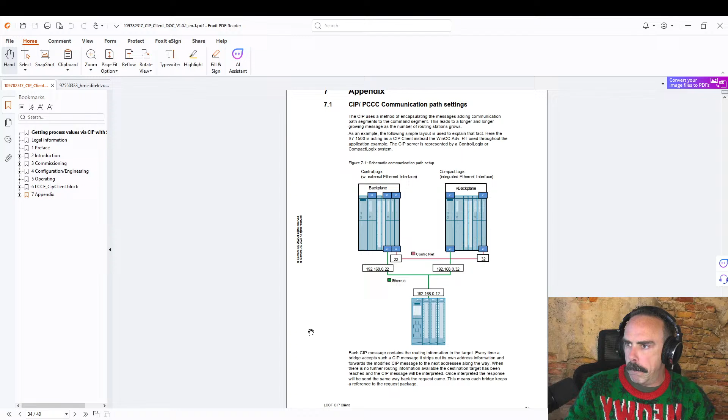There's these little entry IDs and a shortcut on the Siemens support website. If you search for those IDs, it'll go directly to this page. I'm logged in, but you don't have to be for most of this. I'll post these support IDs so you can put those into the page. Also, if you have a document like this that we're going through, usually the entry ID from Siemens is at the bottom, so you can Control-C that, drop it into the search on the support website, and it'll bring this up.

So this CIP client, we're going to talk about it a bit because it's pretty cool—you can access tags without having access to the Rockwell PLC program. All you need to know is the exact tag name and have a network path, which is one of the things we're talking about, because I had a commenter ask about that CIP block on a previous video.

The way I'm accessing it is through a project I used for that video. I have a 1500 PLC, and I'm accessing, I think, a CompactLogix L3 processor. I don't know Allen Bradley stuff that well, but it has an integrated Ethernet port, which is apparently not very common—fairly recent that they put that in. There's a lot of these systems out there with network cards, and the way I have mine configured in that video won't work with a network card because of this CIP routing you have to do.

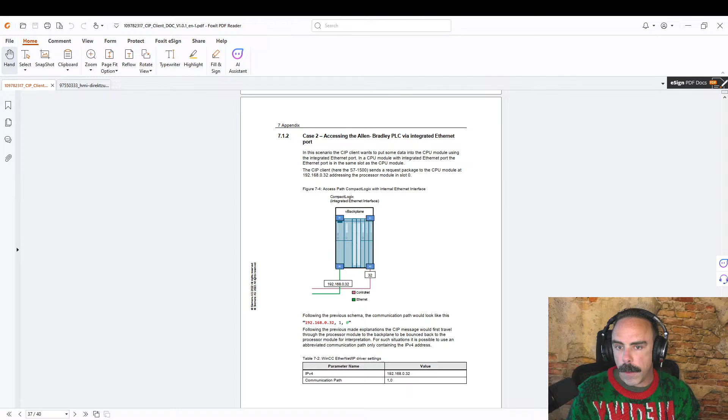The way I had my block set up, since it was a built-in processor, the control path—the communication path—is based off this example. Let me make it a little bigger, go to 100 percent. I have this new PDF reader because the set of drawings for this plant we're doing right now is so big that Adobe doesn't like loading a 50-some-odd meg PDF for some reason. So I'm getting used to this.

What we have here is a control path for a processor where the port is on the actual Allen Bradley processor, and this is what I'm using in my video. The first path for this CIP client block is always going to be set to 1, which gets it to the back plane. So it comes in on whatever interface, and then it goes to the back plane using this interface 1.

So it comes in on the network, and then the network card strips that away and says, okay, where do I need to go? I need to go to 1. And then it strips that away again, and says, where do I need to go to next?

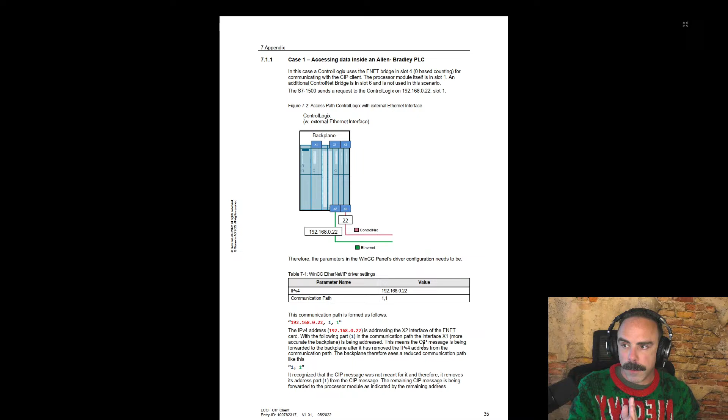So if that is the case, you absolutely can do that. You just have to do the same thing: point it to whatever slot your PLC is in. It can come in on this IP, then into the back plane, and wherever your processor is will be this slot number. The card itself is communicating on Ethernet IP or TCP IP address, so it strips away that and goes to the next thing, which in this case is going to be the back plane. All this is explained really well in this document.

This brings up an interesting point. You may or may not be aware that a control panel, a comfort panel, like a Siemens WinCC comfort panel, has built-in drivers to run with an Allen Bradley processor, and it actually uses CIP. So if you've ever used a comfort panel or Siemens basic panel and used an Allen Bradley driver, you've had to set up this communication path. This is what this is. In this CIP block there's a really good explanation of this whole CIP communication path, and it comes up really well when interfacing with a comfort panel.

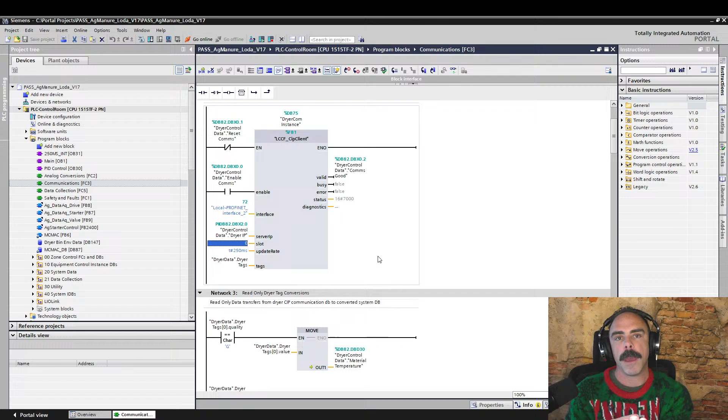So we're going to hit escape on this, we're going to hit up this. In mine, slot 0 is what you would be dealing with to get that to a built-in processor. So it's going to hit the back plane, come right back into slot 0. If your processor was in a different slot, then you would need to change the slot of this.

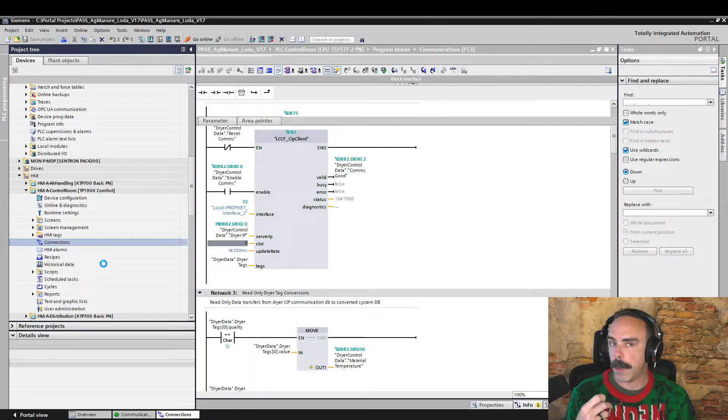I want to show you something real quick, though. We talked about this - by the way, this project is a fairly large project. There are quite a few HMIs, quite a few different things that we have on this. I'm going to show you real quick. I believe the connection is still set up on this, unless I deleted it. I didn't check before.

Ah yes, it is. So here is an Allen Bradley built-in driver connection for a Siemens comfort panel.

So this is kind of awesome. Thank you. Joining in from Russia, that's awesome. We've got an international crowd today. I love more people coming in and seeing this.

If you're not aware, right now we're talking about Allen Bradley. Allen Bradley's mostly in the US, so I'll probably get a lot of US views because I'm talking about Allen Bradley today. But we're going to be getting into some Siemens PLC stuff here in a second. This is the Control Logix, Compact Logix driver built into the comfort panels.

It uses this same CIP concept, and this CIP client block is kind of piggybacking on this HMI connection that Allen Bradley opens up. The reason we can access the tags through this CIP client block is because Allen Bradley wants to make their HMIs work well, so they give access to this. This CIP communication allows this tag access.

So what we have here, if you can kind of see it, is in this driver - if you select the Allen Bradley Ethernet IP driver in your connection on your comfort panel connections, it brings up this little screen. Your Ethernet interface, and your station is going to be a CPU type of either a Control Logix or a SLC - so Control Logix, Compact Logix, or your SLC or your Micro Logix.

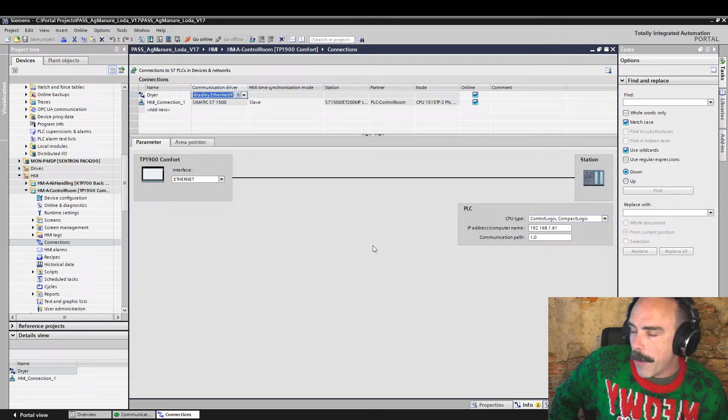Enough of the Allen Bradley thing. I think that the CIP connection is really great, but let's be real - you're probably not on this channel looking for Allen Bradley programming advice. And if you are, I'm not that guy. I have very limited Allen Bradley experience.

You are probably on this channel looking for some Siemens tips and tricks, and I'm going to close out this project that we have open, and bring up the project we've been working with for the past couple of live streams. We've been building up some S120 systems, some G120s, some T CPUs, all sorts of stuff. I want to show you the next part of our broadcast today, and it is going to be our HMI Direct Access.

So a couple of the things that we've been going through the past couple of weeks has been having to do with the...

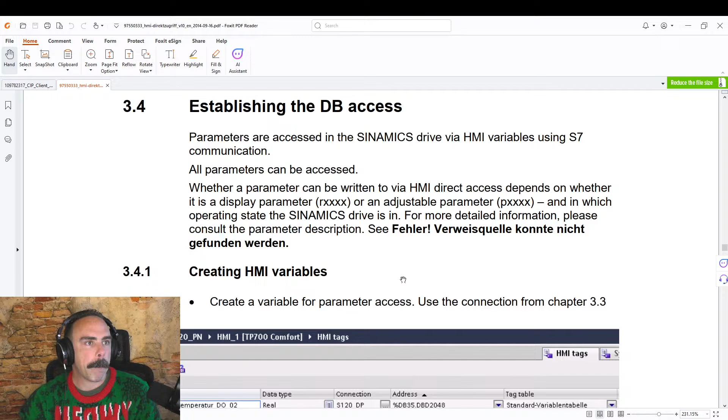So I'm going to step through this, because we're going to go through and set up an S7 connection.

Let's go back into our - my pointer's jumping between the two screens and it's really messing with me. So let's go through, and we don't have an HMI in any of these, so let's set up an HMI.

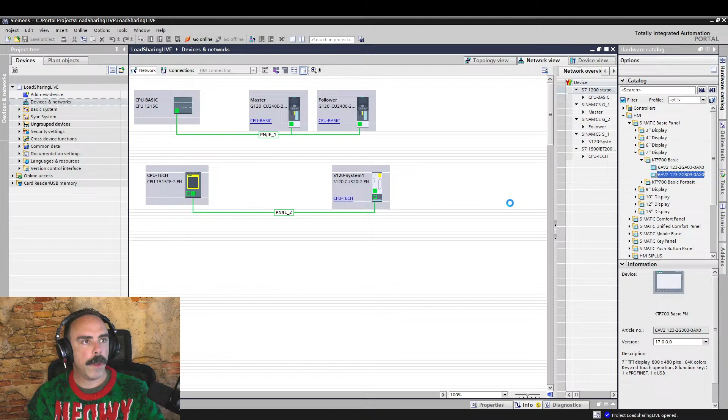Toss a coin to your witcher and let it spin. Don't be impatient, don't be impatient.

We're going to call this our basic HMI. There's a reason I'm putting it on this one, because I'm going to access some values on this, these G120s here. So we're going to save this.

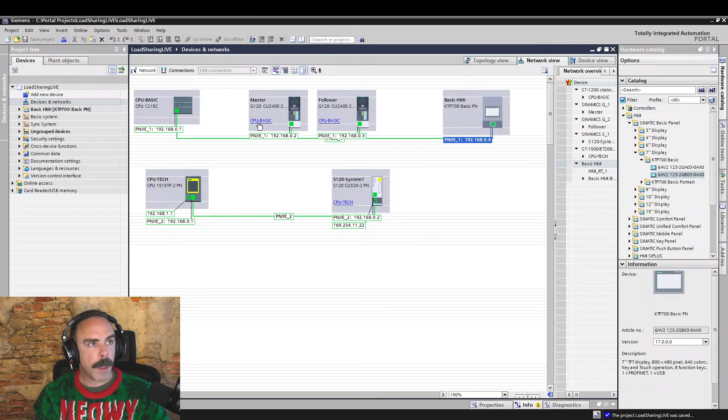I'm going to click this because I'm going to scribble this down - we're at 168.0.2. I'm just writing this down because I don't remember anything that I don't write down. 02 is our, and we're going to access some values on that.

So for the time being, we're going to pull up our HMI, go to connections, and we are going to add a new connection. We're going to call this our master drive.

I would say type F in chat for you master drive people. Oh, it's such a great drive.

Memories. But what we're going to use is our SIMATIC S7 300/400 connection, and we are going to use the Profinet interface on this. What was that, 4? Yeah, 4.

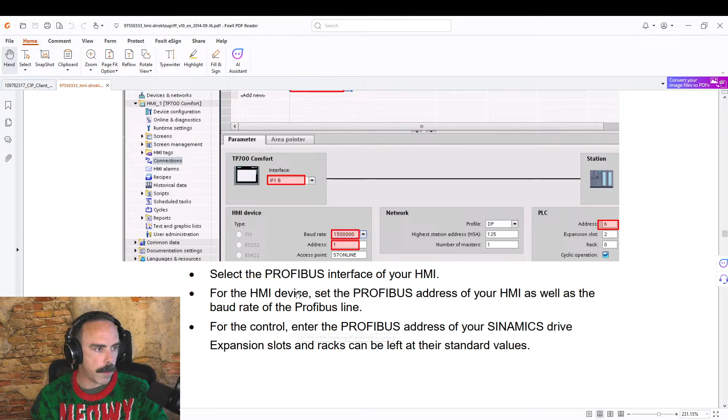And this one we are going to point to our drive, which is on 2, and check to make sure we're doing everything right. Oh, this is a Profibus. Why would you do it Profibus? Here we go.

So the Ethernet of your HMI, and then for the control, that slot 2 expansion are not relevant, because the expansion slots in the racks are not relevant - this is doing some back-end shenanigans to make this happen. The trick is, once you set up that connection like we have here, it's really all you need.

And we're just going to create a tag now. What parameter do y'all want to get? I know we need R89, right? We're definitely wanting to read that, I think, and that is phase voltage U,

and then we're gonna do - and this is actually a real value, we're going to talk about that here in a second - we're going to do U, V, W on these. Here, U, V, W. Okay, so our connection is going to be on our master drive connection, for all of them.

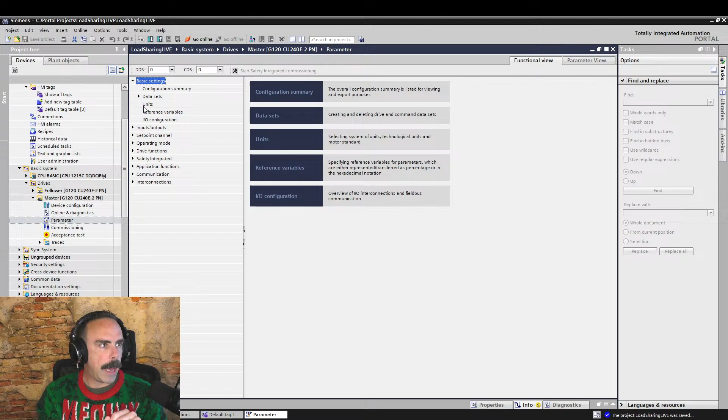First, let's go through and open up this drive master and get the parameter, because I want to show you parameter 89 specifically - it has parameter view, probably extended parameters, and 89. Oh no. Was it 89 that we were wanting? We were wanting phase voltage. Maybe it wasn't 89.

Or is it just that we are going to... we won't do that right now. We totally had this before. Oh, it might not be on. Hold up, is this only available on S120? Have we done this? Have we made this work? Is that what we're looking at here? Because 89 is actually only on...

Yup, there's our problem. So, all right, real quick - you know this is live, and this is real world stuff. R89 is only available on an S120 apparently. It's not available on this, so let's do this real quick. No one will know the difference. Oh, that's probably... is that going to delete the whole thing? Okay, no, no one knows the difference.

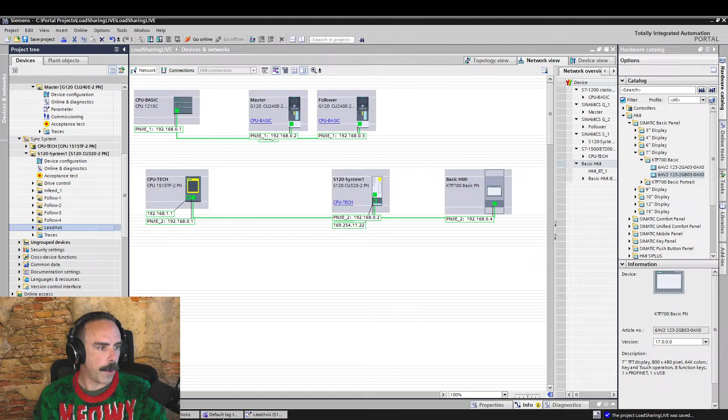024. Yeah, and this will actually give us a little bit better. Now, the cool thing about it is the same stuff works because we are still in this, but we were wanting to do 89, and I realized that it got quiet all of a sudden because the music died. Okay, so we still want to do this UVW.

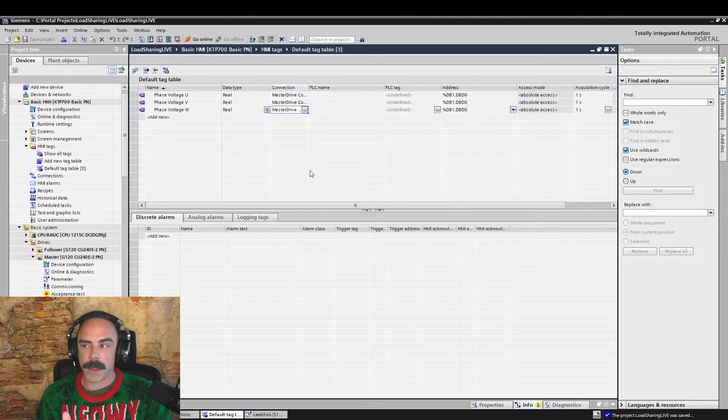Now, doing this on an S120 does make it a little bit more complex, but not too much. And if you don't appreciate that because this is all in a single portal project, I was able to do what I just did, and that this would actually be okay - if you don't appreciate that fact, bless your heart. Portal can be cool sometimes, when it's not eating up like 32 gig of memory and crashing your computer.

But no, so we've got this actual phase voltage that we're looking at here. And let's look at this documentation here, because what we're going to do is point to a specific parameter based on how we make this address. Okay, so the basics is the data block number is going to be your parameter number. And then there's a little bit of a thing for the data block, like the actual DBD value.

For us, it's going to be DBD because this is a real value, just like we have here in the motor temperature that they're pulling through here. So we're going to go ahead and say this - I'm going to pull this down on another screen. So our DB value is going to be DB 89 for all three of these, because it is parameter 89 and then it has an index. So parameter 89 for all three. And then now let's go back to this and figure out what this parameter index is.

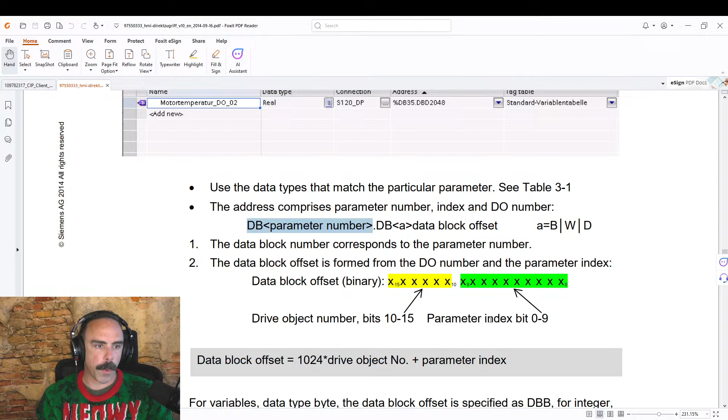Now, because this is on an S120, we may need to - well, in the compilation, this connection - so the question was whether or not the connection needed to be updated because we changed networks. So the thing about this connection is when we do this compile, this is the interface for the HMI, and this is the interface for the drive. And as long as this address here, .2, is the same for the drive, then there's no problem. So normally you would absolutely have to have gone and done that, but it just so happened that...

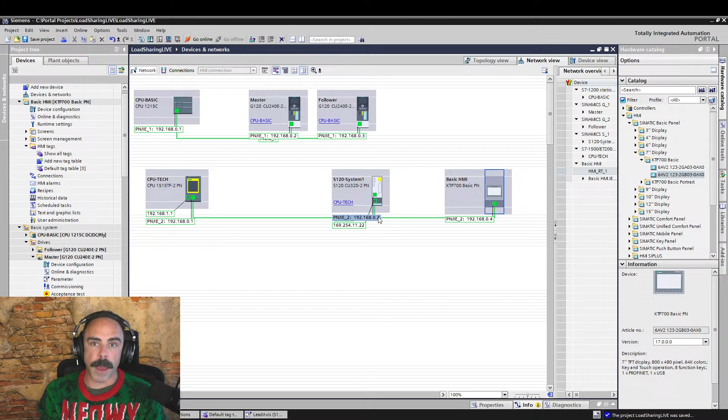the master drive has the same IP address as the S120 system. So the HMI doesn't know the difference, and because this is in a portal project, the HMI can be shifted around in between all of that. So great question, Steve - if this was, say for example, on the same network, and this was like a .7, we would absolutely have to go back in and update this to a .7. But it just so happens, by happenstance or by luck, the IP addresses were the same for both controllers. So great question.

So back to this difference - the reason I was going to do this for the G120 is because the G120 technically has drive object numbers, but it's just the same for everything. An S120, because it is one drive system to rule all drive systems, has so many different options of drive kind of objects. So if you're not familiar with what a drive object is, let's go into the device view of our S120.

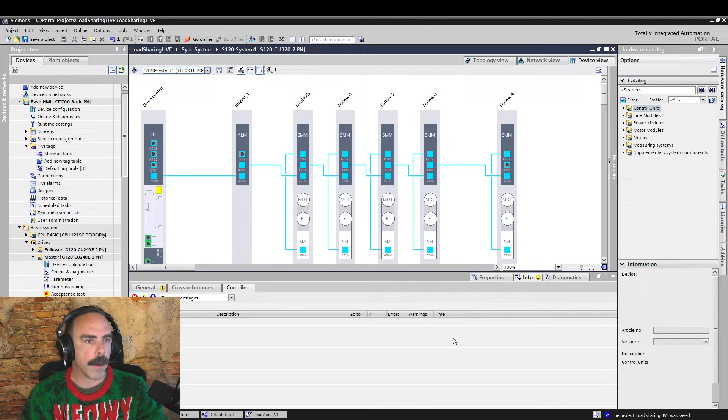There's actually a lot of stuff underneath that one point, and that is a highly technical term - it's a lot of stuff. Let me hit Control 5 to pop up our inspector window here, and I want to show, if I click on this, it brings up all of our stuff.

Where does it show it? There, it talks about drive object numbers in here. So this is where you'd be looking for the drive object number in Starter. Drive object numbers, you can kind of think about it - if something has an expert list, so it has a parameter list, it's going to have a drive object number. Control unit, terminal blocks, motor modules, CB boards - like anything that has an expert list or a parameter set has a drive object number.

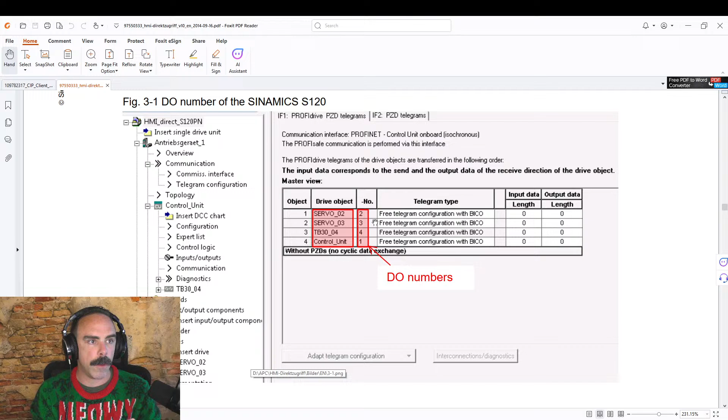Here's how you find them in Starter - it's just in the telegram configuration. It tells you the drive object number. Hopefully Portal has it in kind of the same place. It's probably the slot number if I had to guess.

Let's see, does that change? Oh no, I need to stop clicking. Nope. Where is it? So let's see if we can find it - this goes back to me not being prepared. Ah, there they are, item numbers. It's kind of the same place. What are you talking about? See, I knew where that was.

What are y'all saying? So drive object numbers - these item numbers in your telegram configuration are your drive object number. So for this, we're working with our lead axis, and we have a drive object number of 2. In a G120, this would always be 1.

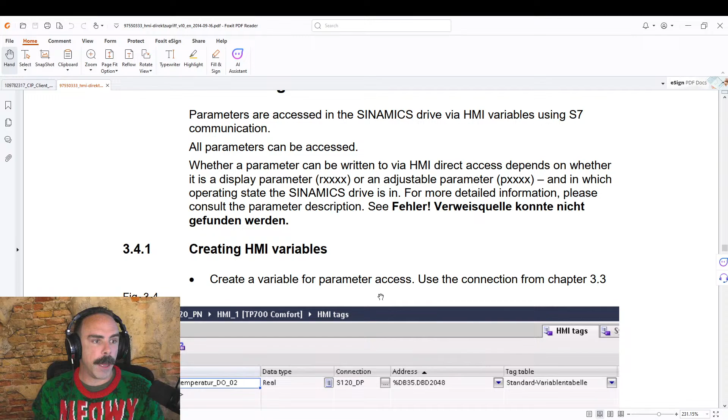The reason why this is important is because in our documentation, our actual - so you have data block number and then actual word number. In this case, because it's a real value, we have to do a DBD, so a double word. But our actual data value is not straightforward. So our drive block offset, our data block offset, which is that DBD, is 1024 times drive object number plus your index number. So how about let's do this?

Because I want to go through this, let me get my stuff pulled up here and start it up so I can draw. Has anybody in chat actually ever used these functions while I'm getting this up?

We've got a couple of people here today, so if you've used this direct parameter access, let me know in chat, because I don't think many people know about it, but it's one of the coolest things that you can do.

So, is this gonna work? Yes. All right, so let's flip over to our page, our sketch pad down here, because I want to go through this. Most I have not found many people that - so our DB is 1024 times drive object number.

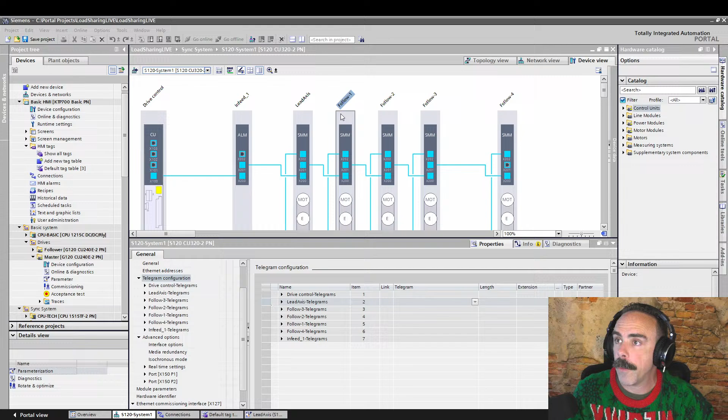That's it, for real, that's it. Now we could go through and set our acquisition cycles. If you notice, we can get these pretty quick, acquire them pretty fast. Let's say fairly fast, and you can actually set up faster ones of these. I don't think you can set up much faster on the basic panel.

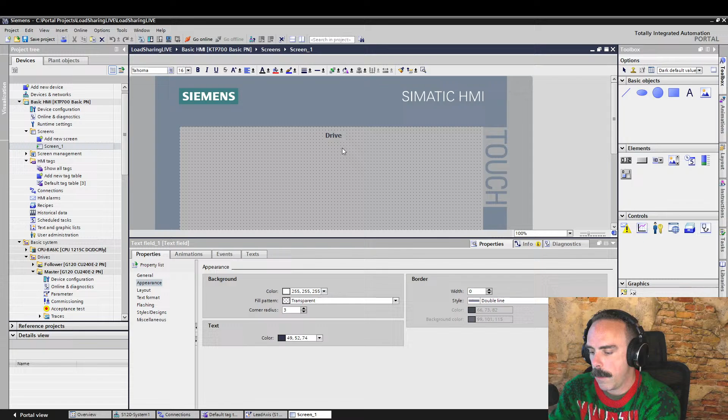So 100 milliseconds right now on this basic panel is probably about as fast as we're going to be able to do. But let's make a screen, and let's just do some quick... let's do this, drive. Okay, and then we want some outputs.

That's terrible. Undo, undelete. I wanted to do click here and then...

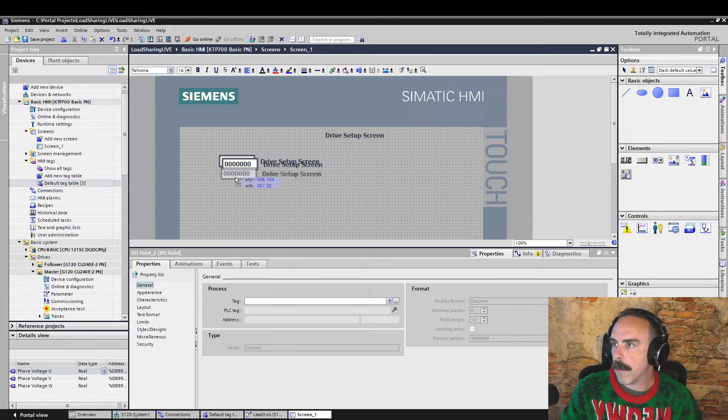So what we're doing right now is we're just setting up this tag. So we click here in our inspector window, and then actually before we do that, let's do this. Control, C, V, line that up, and then V. Oh look at that, so fun.

So then now let's just drag this over here, actually get it in the box. Drag V. Click. Drag V. So that's U, V, W.

And so that will, on a 100 millisecond cycle, set up our drive. So that's that R value that, remember, could not be connected via BICO. So we couldn't bring it back over our Telegram in our fast update cycle. But using acyclic communication, which this is using, we got these values.

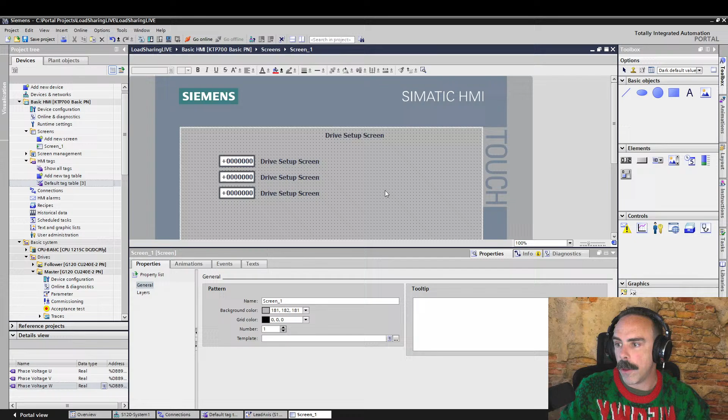Now this is coming into a HMI, and this is using HMI Direct. And before we get off this, I want to show you, just put some stuff into your minds about the drives. So Control 5, drop that down.

So your parameter 300s are all your motor values, right? And if you notice, all of these are kind of locked. And the reason why these are locked is because they're only accessible when you have a certain parameter value, which in Siemens world... I'm clicking a bunch of stuff.

And I know I have some FA guys from Siemens USA yelling at me because I'm only doing this in expert list and parameters, and you're making it seem more complicated. Well this isn't straightforward. If you don't know what you're doing with drives, you probably don't want to be doing this. But one of the things is these values that are like your motor parameter numbers.

So like, let's see, rated motor voltage. It's got this little lock on it. That lock is because this is not in a commissioning state.

And so what we can do is if we go up here to P10 and we set it to motor commissioning, should give us the ability to change some of these. Actually, well, maybe it's the fact that it's not on. Well anyway, something's locking that out.

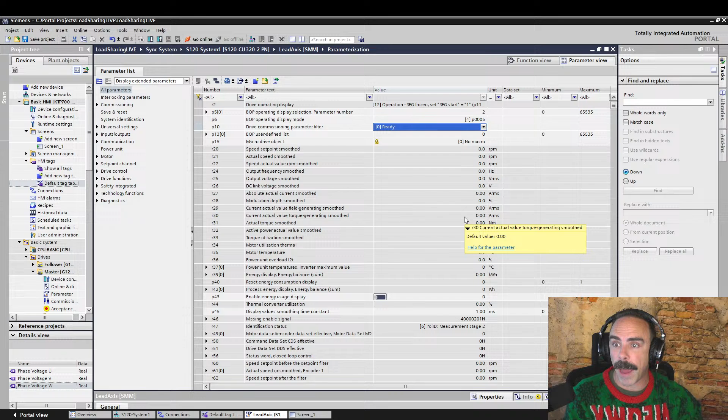Just in the parameter list for right now, and it's not really the point. But if you wanted to change some of these values online, for example this drive commissioning parameter, this P10, if it is set to ready, there are some values that you cannot change parameters for. And now with BICO, you can't change any parameter because it's not a BICO, it's a P value. So like these P values here, unless it has this BICO connector, you can't connect something into it. So these P values here, you can't change that value through a Telegram.

But with acyclic communication, you could totally 100% go through and use our HMI direct access and set up a screen to where you could go through and set up motor values. But if you wanted to set up motor values, you would need to put the motor or the drive into this P10, it would need to go into motor commissioning.

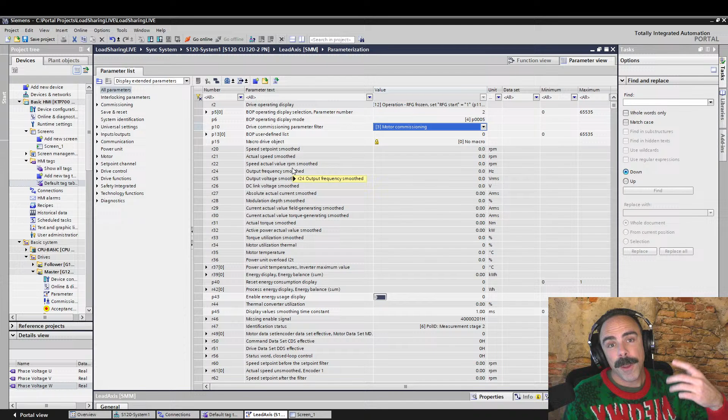So on our little screen here, we would want to have, instead of an input only, we would want to have this as a, did I pull that? We would want to set this up as an input output and then set up a tag for parameter 10, and do the same thing. So that way we could change P10...

To 1. And then if we wanted to really even go, we could even go as far and do a text list, and instead of using an output, we could go and do this type of stuff here. This isn't quite HMI, wanted to talk about acyclic communication, and this is an example of it. You are directly accessing an acyclic block. So let's go down, and I'm going to show you how to do that in your program now.

And I just realized that I may not have this library loaded in here. I wonder if we do. I don't think I do. I think I might need to load up.

No, it doesn't look like it. Because what I am wanting to do, I'm not going to be there anyway. So we're going to bring up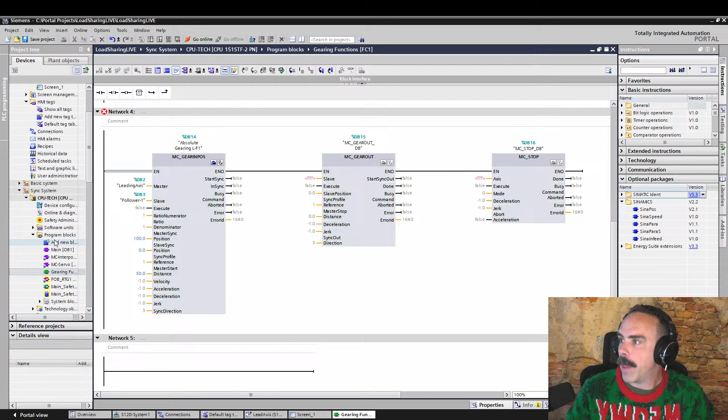So we're going to talk about an acyclic block, and let's go ahead and make our own little block for this. Let's add a new block called parameter access. We're gonna do this little function block here. Don't care about all that, we're gonna make this new one, and we're gonna close out everything but that.

Because what we are going to use is a little block called SinaPara. And so we want to use SinaPara, and let's do this to a G120. Well yeah, if we want to do that we need to do it on the other, because I think the SinaParaS specifically has a drive object number.

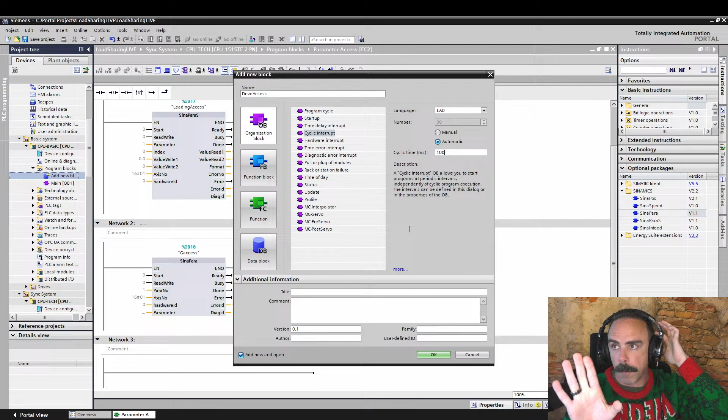So this might not be the best way to do this, but I just wanted to show you the OB30 block, the cyclic interrupt block, because we're going to use that for the PID here in a second as well. So we're going to use this drive access, open that up, and pull in our SinaPara block into this one.

Now inside of this access, in this one we would just be able to do like a no op, because I apparently don't have that constant defined. Anyway, so we could run this all the time. So this would be like we could do an always-on bit for this.

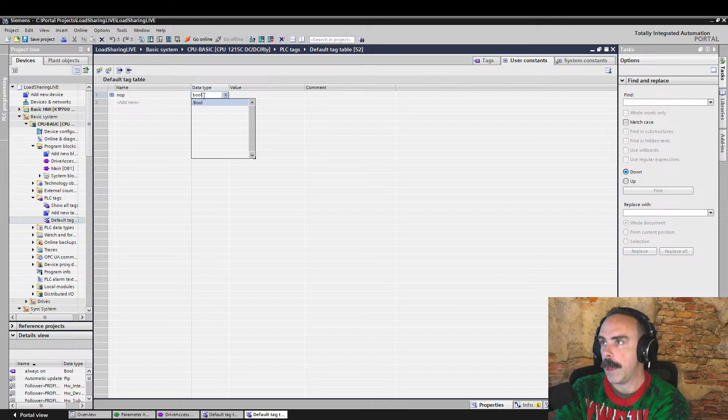We could do that as an always-on tag. If we wanted to define that tag, we could just set it as M0. And if we wanted that to always be on, we'd go here in our PLC tags and set that. This is what I like to do: I like to define it as no-op, data type Boolean, value false.

The reason we can do this is that anytime this comes in, you know it's been 100 milliseconds, because this cyclic interrupt block is only firing every 100 milliseconds. So you can start this and run it as often as possible.

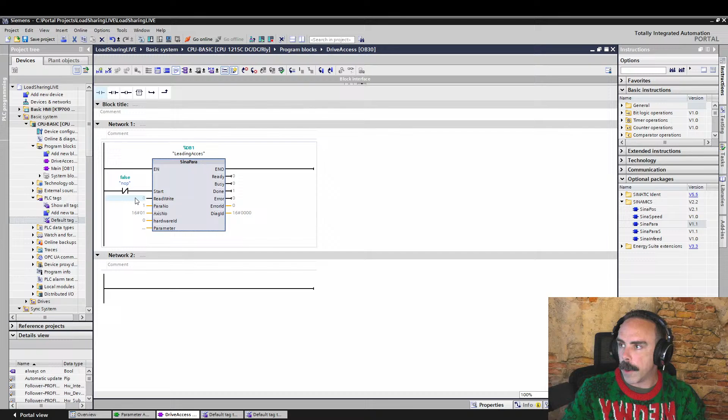For this one, read-write, does this have it in version 17? I don't think it has them. Read-write is whether or not it is... function block. So 0 is read, 1 is write. If you're just wanting to read this value, we'll just leave it at 0.

Parameter number is - I believe that parameter number, sorry, I'm looking at the actual number of parameters. Interesting. Yeah, so it's the number of parameters you're reading. So you can read up to 16 parameters. I got that one backwards.

And so this input value here, for the input interface, hardware ID - using this block, the hardware ID is going to be the hardware ID of your actual device. I believe, for Profinet follower, make sure it's your module access point. It's not the Telegram, it is the module access point. If I'm wrong on that, I'll have to look it up again.

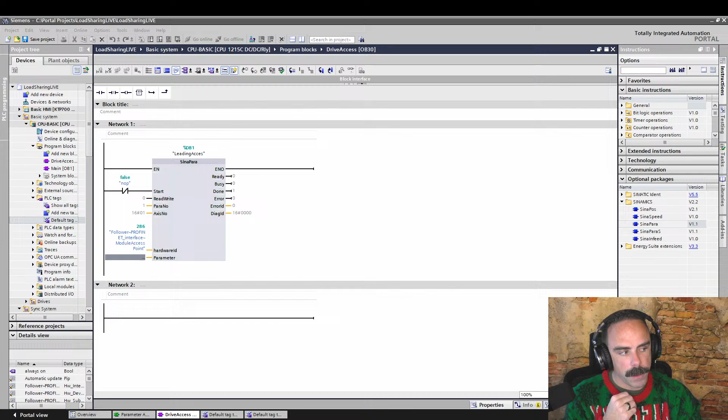So not quite as simple, and maybe we're getting off in the weeds here and losing our momentum, but what we're talking about is this parameter value, which is the last input. The first five inputs are fairly simple: the axis number, drive object number in a multi-axis system.

So the hardware ID - let's go back to this. To make sure I'm explaining: hardware ID and axis number. Axis number for a G120 is 1. Axis number for an S120 is that drive object number we talked about before. Parameter number in this case would be - sorry, no, it would not be 89, it would be 3, because we're wanting to pull 3 parameters, 89 index 0, 1, and 2. This parameter value is the tricky thing that can get you hung up.

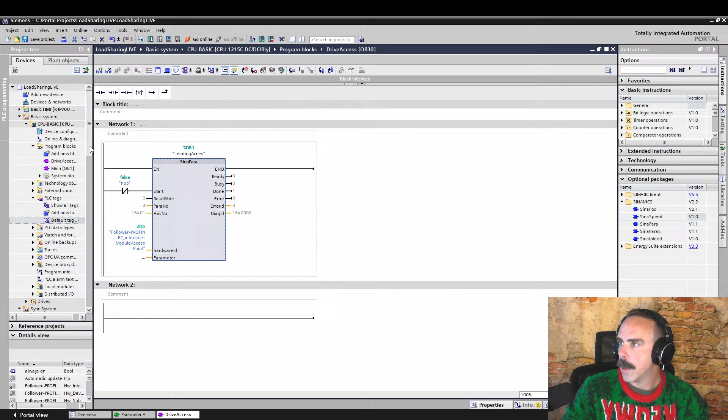SinaPara, this little data block structure leaves something to be desired. So let's jump real quick to where we want to do a PID. Let's add a new block. Actually, let's go through - not gonna lie, this is something I've set up before. There's a couple ways of doing it.

I wanted to show you the technology object way of doing this PLC or PID, because in your technology object you have a PID, and you have a couple of different options. You have this PID compact, which technically isn't what you'd think of as a technology object. The technology object is just like an interface into setting up another block.

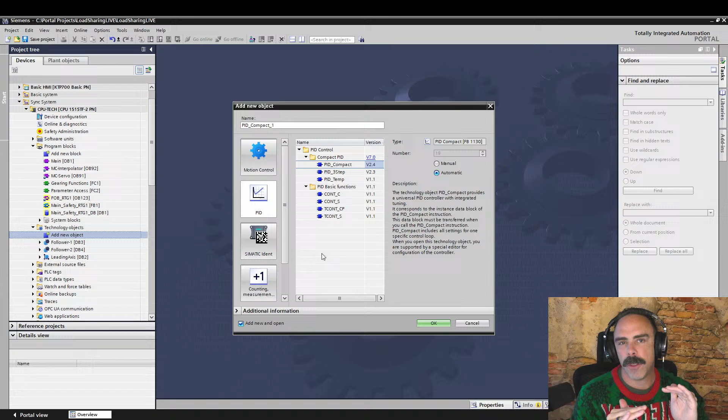I think it says here - yeah, the description says the technology object PID compact provides a universal PID controller with integrated tuning. It corresponds to the instance data block of the PID compact instruction. The data block must be transferred when you call the PID compact instruction. The PID compact includes all settings for this control loop.

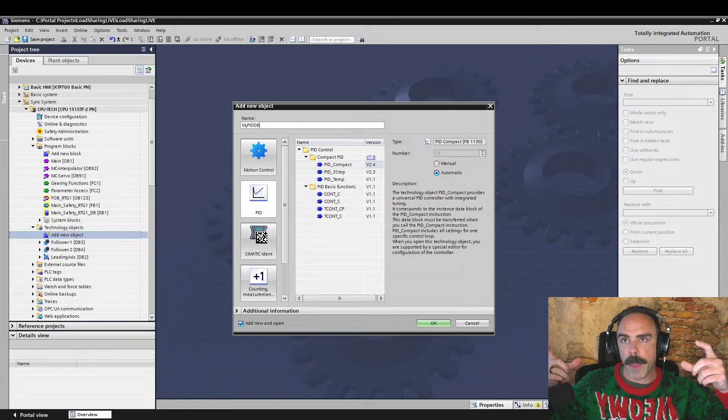So I'll show you what we do here - we'll do my PID data block. If you set it up this way, this is the instance data block for another call that we'll talk about later. It's a little confusing going about this way, but this channel has a lot of technology objects, so it's easy to set up all the values using the technology interface.

So we'll go through and do this PID compact. It's super easy, straightforward, something I've done in the past - hopefully past Jason can inspire present Jason to set this up on the fly. General percent - your controller type, a general PID, in percent there's no units, and you can set up different things, and it will set up scaling and scale factors and everything in general. I normally use just a general percent-based PID.

Because I'm going to be sending this value over to my drive in percent. Remember that this value is just being set - I just realized I had blocked all of the library things because of where my head has been this whole time. We're learning here. But this is just setting your PID in the processor.

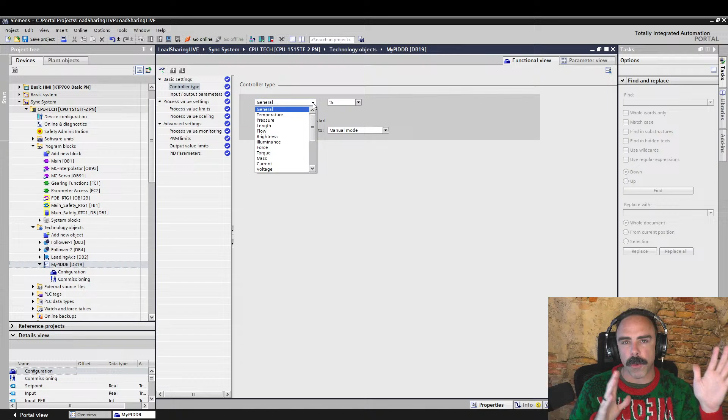So we're going to leave this as general and percent. This invert control logic is saying that by default, if you have a bigger error signal, you need to have a bigger output. Inverted means that if you have a bigger error, you need to have a smaller output. So it's going to be making a smaller subtraction.

So we can kind of just go through here and talk about this, but these are just going to be tuning values that we'll be working with later. I want to show you how you actually set this sort of stuff up.

Now, I will say this thing has a self-tuning mode on it, so we're going to do this most likely. In our advanced settings, we want to enable our manual entry. Our proportional gain, depending on what we're going to be doing, one might not be appropriate. We'll talk about what these are in a second, but I want to show you how to set this up.

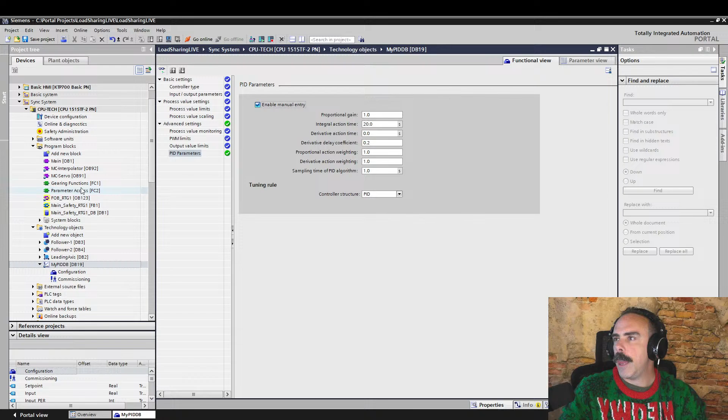And if I remember correctly, there may even be a thing where you have to bring in a value for this. It might tell it how often it's being updated, because this is a PID—there's an integral value, so there's a continuing time section on this.

So what we're going to do is create, click the wrong thing—we're going to add a new block. We're going to add one of those cyclic interrupts, and we're going to have our PID cycle. This is in microseconds. If you notice, the S7-1200 was in milliseconds; we're in microseconds because we're on a 1500T. Orders of magnitude different performance levels between the 1500 and the 1200.

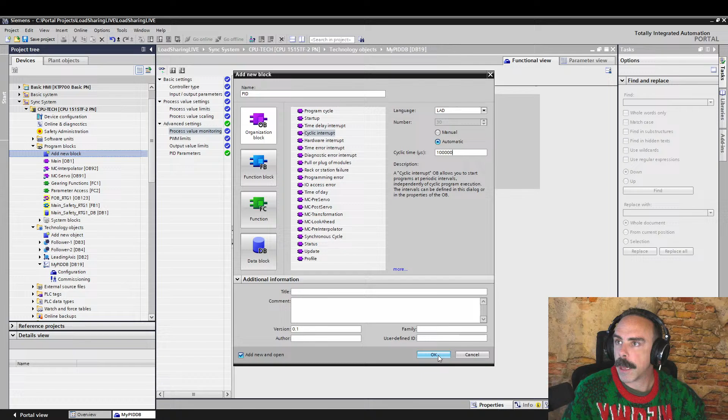So let's do this. Let's go 100 milliseconds would be... right, so by default it was that same thing. So 100 milliseconds by default, but this is in microseconds. So 100,000 microseconds is 100 milliseconds, cyclic interrupt, PID.

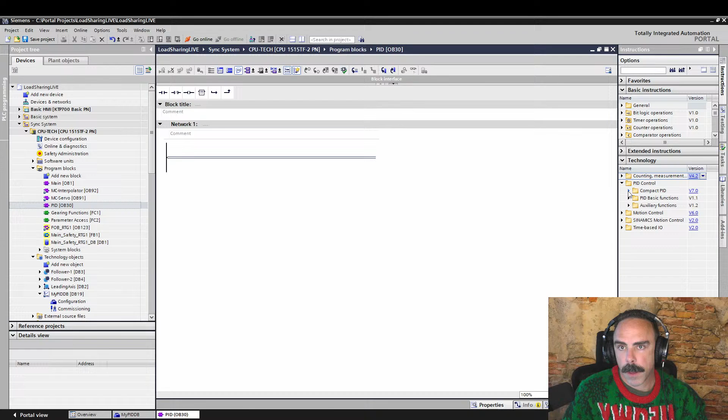Now what we're going to do, I believe, is in technology, PID control, compact PID. So PID compact, right? And now we are actually going to select my PID DB—the data block that was created by that technology object menu, that's what we're going to select. And we're going to bring this in.

So apparently in this version of Portal, which I believe is version 17, it has automatic detection of how often it gets updated. Before, there would be an input that you would actually have to tell how often it's getting updated. So that's cool.

Now, if you'll notice, I brought up the extra inputs. You have your set point, your input, and your input in percent. Let's bring up the help file on this just to show kind of what we have going on.

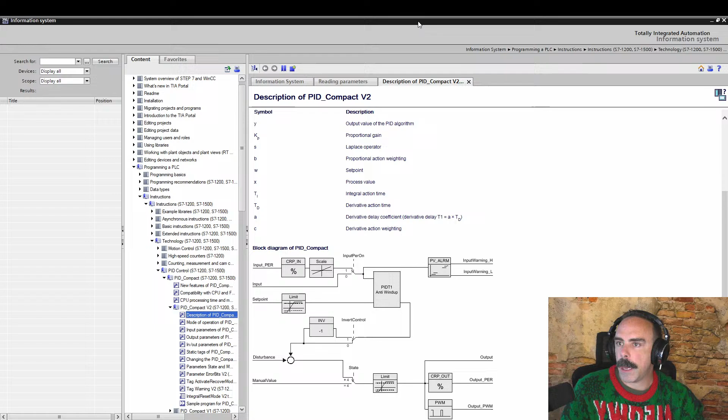And this can get a little complicated, so let me take the time to go over here to this and clear that. If you're not familiar with these control charts, is there a way I can zoom in? These kind of might be a little bit annoying or a little bit confusing.

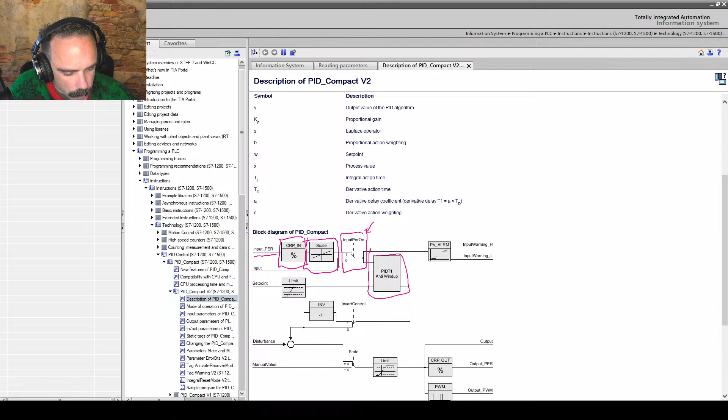But just know that you're going to be following through, and then this is going to be some operation, and then this is some switch. So if you have your input in percentage on, it switches between the input in percent versus your input in the standard input. Again, this is a function, and you're just following through these functions, and then it's going to follow through and go to your output.

So that might have made it worse, but just know that in these, you're going to be looking at—what is this? Who knows? You don't really need to know, it's a black box, you don't have control over it. Your percentage in, your input coming in—this is some sort of scaling that you're going to be using.

So we're going to go, our set point is going to be, for example, let's do a flow control, and we have our... all right, let's see, let's do it this way. Let's have a pump that is connected up to a G120 drive.

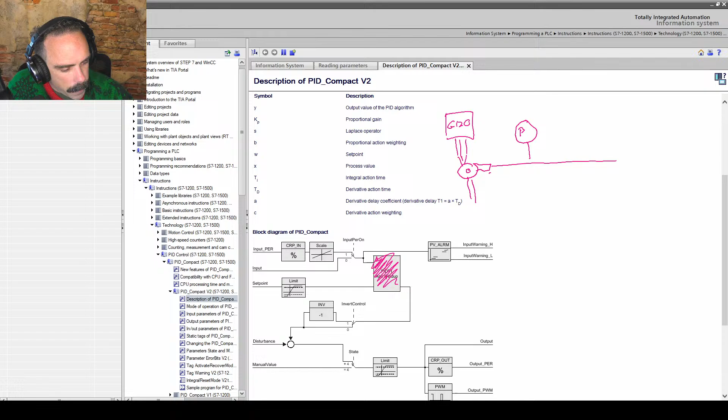And it's connected up. Okay, we have our pipe, and we have a sensor here that is pressure on this pipe.

And we want to control for pressure. There's a couple of different ways that we could do this. We can send our set point signal. Our set point is going to be the set point for this. So what we want to actually control is pressure.

And we kind of go through here. Set point is pressure, and then you need some sort of feedback. So this actually is the feedback signal. This is going to come back into our PLC, and that is actually going to be our, where is it, invert control, disturbance.

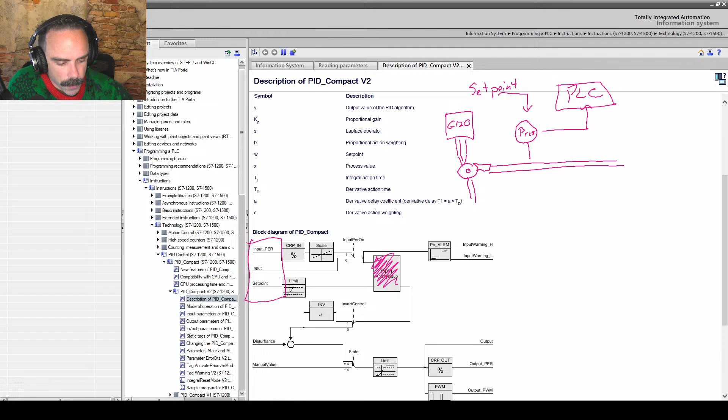So our actual input is going to be this input. So here's how to think about this, because both of these values, both input and set point, this is essentially our feedback, and it's going to generate an error signal that is going to send us an output that is going to be higher or lower.

And so our output percent is going to be what is going to actually be going to the drive. And if you do everything in percent, it just makes a lot more sense.

So what we're going to do is, if this is like a 0 to 100 PSI gauge, we're going to take and scale 0 to 100 to 0 to 100%. Now, it just so happens if you had a 0 to 100 PSI, it'd be the same numbers, but this might be 0 to 1000 PSI. And so you would want to scale that to 0 to 100%.

So if you're doing all of this in percent, then that's what you're wanting to accomplish there. Your drive is going to be 0 to 100%. So the output of this is going to be in percent.

So with that said, you're going to bring in 0 to 100% for your set point, which you can absolutely go through and have on your HMI a screen that's like, what's your set point? What's your set point pressure? And it be in PSI. But you're going to need to take this value and scale it.

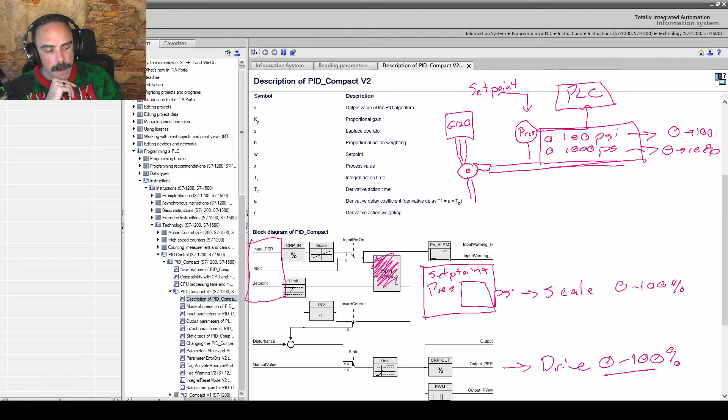Because if a drive speed of, say, 10%, I'm going to clear all of this. So if a drive set point of 10% generates, say, 2 psi, and the same set point at 50% generates 5, and then 75 generates 10, and 100 generates 30,

and you set an input set point, so like a PSI set point scaled to percent of, if your range is, I mean, it's nice to know, because I'm in this setup, if you know your PSI range is 0 to 30 for your machine, and you put in, I want 30, or I want 20 PSI as a set point, it's going to convert that to whatever that is, 80%, whatever it is.

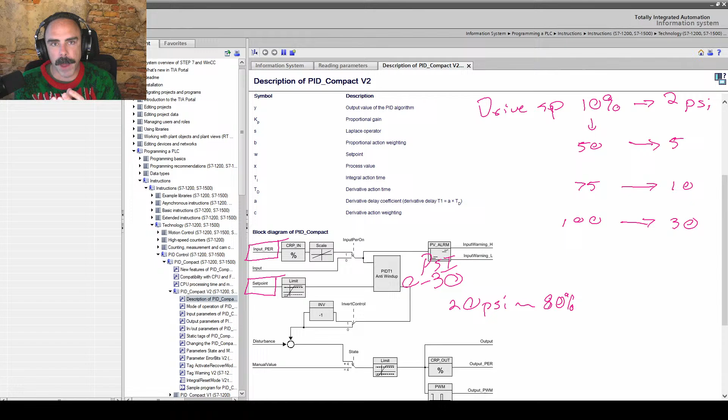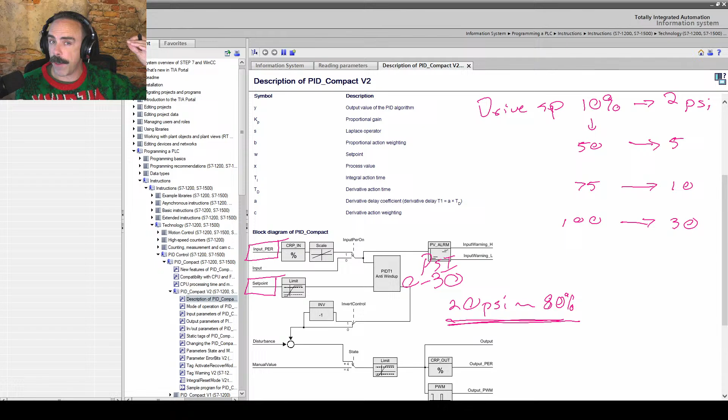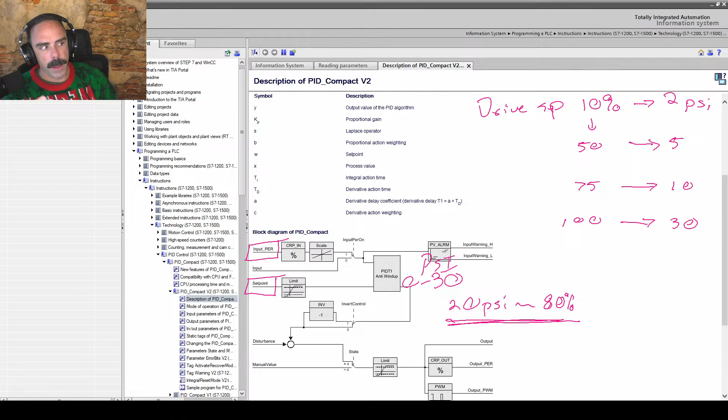Yeah, it's kind of hard to explain until you actually start working with it, that you're, because when you first start thinking about it, you're like, oh, how do all of these figures relate together? But there is some relation, and the PID function itself is going to ramp up and bring, if you have a set point of 20 psi, if like your 20 psi set point equates to 80%, and your feedback is going to be on that same psi, 20 psi equals 80% on your feedback, then it doesn't matter what the actual output is. It doesn't have to be 80% on the output, if that makes sense. And maybe I'm overthinking about it. It always confused me when I first started working with PIDs, like how, so yeah, so at 80%, you're going to have, so I'm looking at a Siemens.

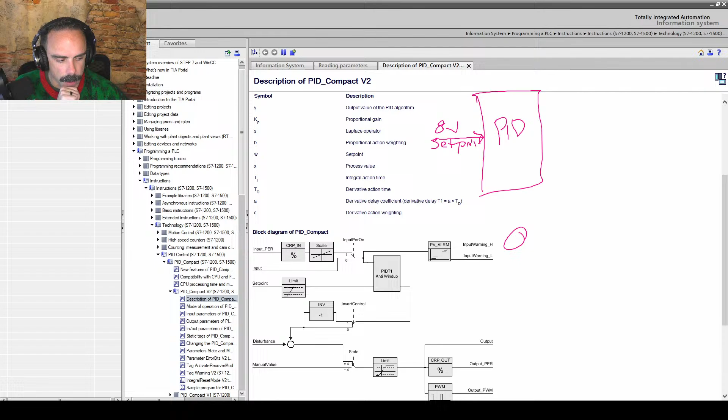If it's 8 volts at output, and it's in a 0 to 10 volt range, that's exactly going to be right. So your input, if you're at 80% going into this PID block, your input would be 8 volts going in - sorry, this would be your set point, would be 8 volts. So your feedback coming back from your actual sensor needs to be scaled to where 8 volts equals 80%.

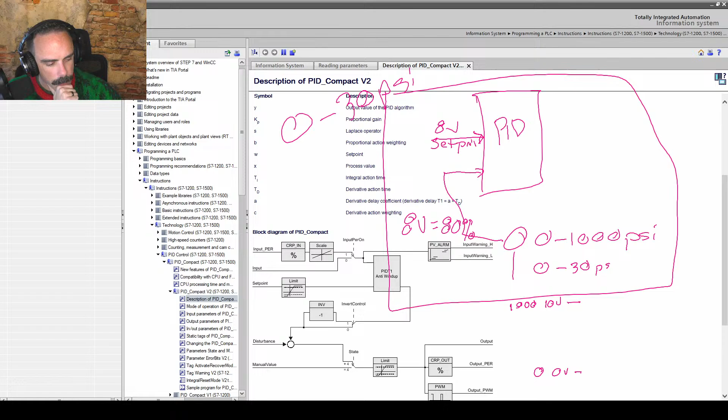If that makes sense - even if this sensor is like a 0 to 1000 psi sensor, if your whole system itself is only 0 to 30 psi, you need to have on your sensor - you're going to lose a lot of resolution on this sensor, because you're only going to be using 0 to 30 psi, but this sensor is going to be like, if this is a 10 volt sensor, 0 to 1000 is 10 volts. So 10 volts, 0 volts, and if that sensor is that way, you're way down here - you're like 30 psi way down here. So you would have to scale this little bitty section as equal to 0 to 100%.

That might be confusing, but that really goes back to - if you can only output 30 psi with your pump, you don't need to be using a 1000 psi rated sensor, because that scale value, you don't have any resolution. You have like one tick, and that's really not going to work well with a PID block, because it's going to see the ever so slightest bit of noise in that 1000 psi range show up as 2 or 3% swings in the feedback. And so this would be a horrible system.

Now, if this were a 300 psi sensor, maybe not that big of a problem, because then you're going to be looking at about a third - you still could probably find a better sensor there, but now you have this whole range here. You would have 0 to 3 volts instead of 0 to 0.3 volts or 0.03 volts, whatever that would be.

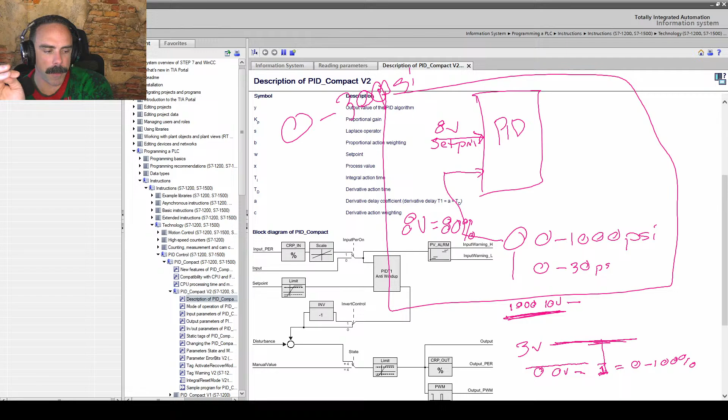Yeah, sorry for rambling on this. The first time I started doing a PID by myself, it didn't quite make sense, and I'm sure I've just confused you even further. But if you have questions, and you're watching this on demand, feel free to ask. I absolutely love working through these with you guys too.

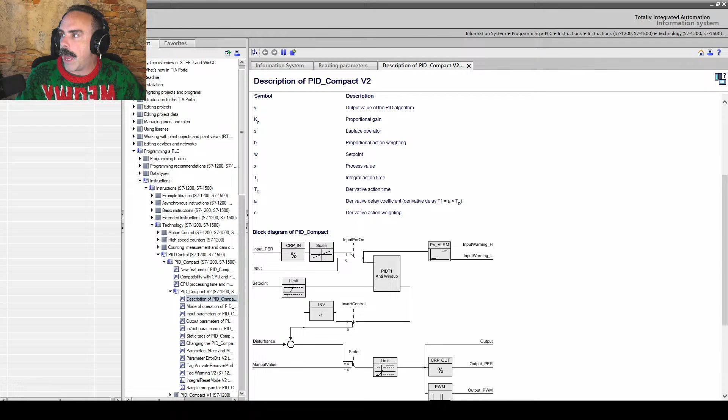So in this case, let's have our set point be something from - I probably need to actually move over to the correct spot. Yeah, so this is going to be our tag that is our PSI, and I don't quite have it yet. So let's look - if we use input in percent, it's going to have scaling in it. So let's look at the technology object, see how that is. I want to show you how this stuff ties together.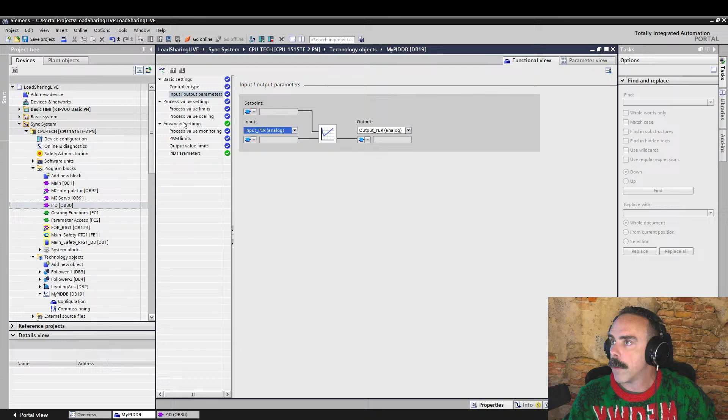Remember this kind of little block down here, it's shown a little bit here. This has a lot more information on it, but you can see that percent is going to be from analog, because you're going to need to have some sort of value - process value scaling. Yeah, there we go. So if you have that input in percent enabled, it needs to go into this, and you can set, say we're looking at PSI and your set point is in PSI.

You're going to have your high process value. Let's look at our example of, let's say we have a 0 to 300 - so 0 to 300 is our PSI. So, say this is PSI, and so 0 to 100 is 0 to 300 PSI. But that's the whole range of the sensor.

And so if we had 1,000, like that, that would be that. This is why I tend to just try to bring everything in as percent on the inside, because I don't always like it - because I like just bringing in two values that are the same, like we talked about. This has this built-in stuff, but I would have to go through and actually fiddle around with it to see what the outputs came up with. One of the things you always want to make sure is that you test your code specifically for your system with your specific sensors.

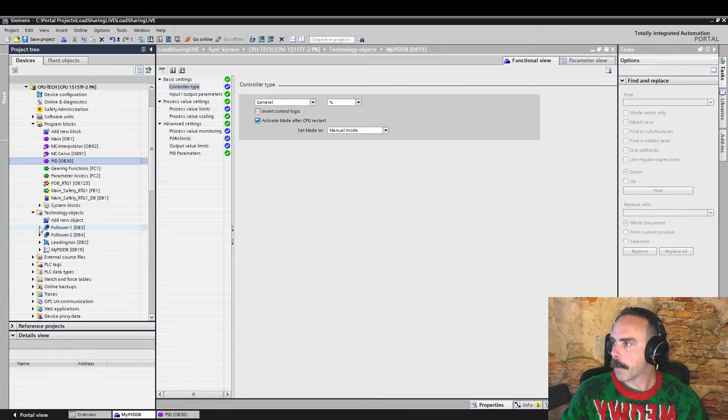So that's what these two are. We should have in our setup these two values here. I'm gonna say follower 2. We have this hooked up to a...

I was thinking about a way to actually set this up. I mean honestly, this output here, that if we set up everything as percent, scaled, and then our output is going to be in it.

Alright, obviously we don't have these tags right now, just trying to get through a couple of things. The biggest thing you need to know is that this has to be called over and over and over again. You could do it in OB1, but the problem is it's trying to detect the cycle in between. So your input versus your integral component has to do with how long you've had an error present. Your integral component grows based on how long you've had an error.

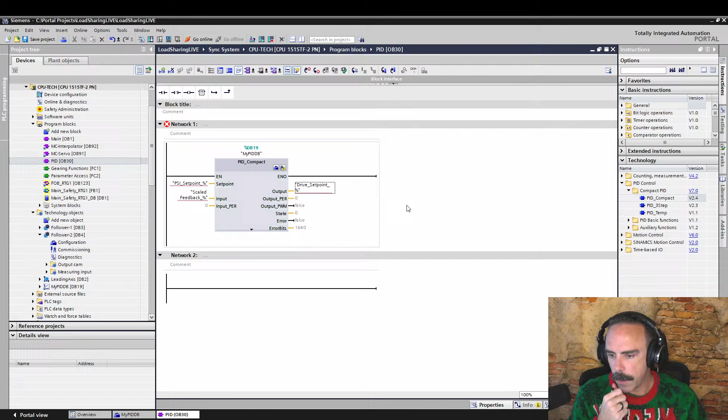Let's bring up just a little bit about a way to tune this now, because that's the basic setup we have here. Let me get a blank pad down here on my drawing pad, just trying to set up some paint here.

If y'all have any questions about these inputs, if you've never used a PID before, I got a... let's see if I got it here. No, I don't have it, but I guess I got a really early start in automation.

Because really my dad did this. My dad did this for years. He retired from coal mining after 38 years. This was probably 6 or 7 years ago that he retired, but he also would do this type of work on the side for different companies. So I got this kind of experience early on from my dad.

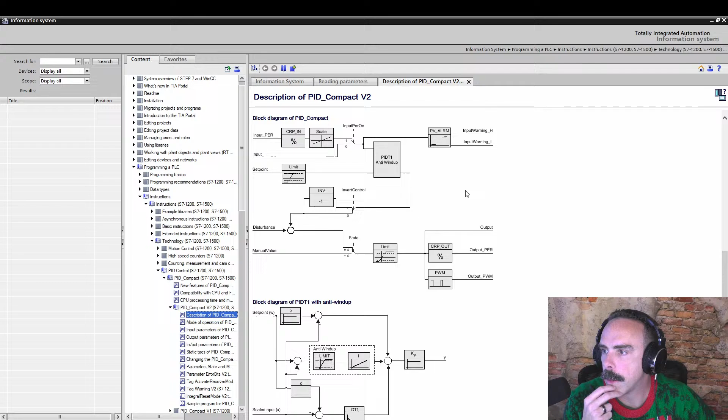The mode value. Because I want to say there is one. Maybe not. I'll have to come back to you on that one, just in the block.

Oh yeah, definitely flipping it to manual mode and then sending it. Sure, yeah, Steve. I mean, you could always do something like this.

Yeah, you could always do something like this, like a move. I don't know if I'll actually be able to do this. Let me just define some tags here. Don't ever, I hate even showing this on the screen, on the stream.

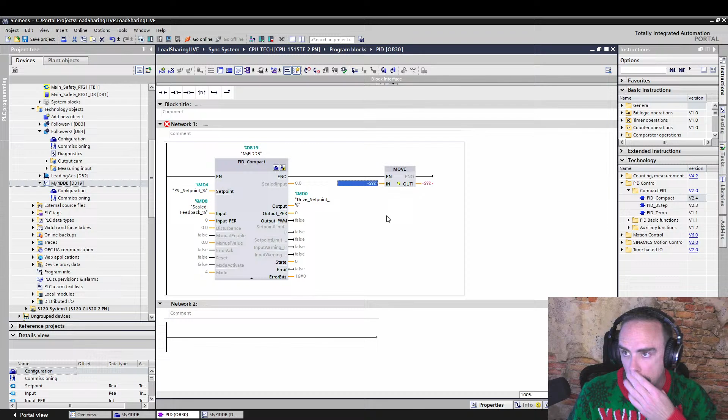Yeah, so the manual mode forces it to whatever your input is, forces it onto the output. So like your input, like your scale percentage would be the output. And so you could do something like this to where you're moving like a...

And I hate doing this. I'm going to be deleting all of these, all this in memory. But yeah, so we're moving this drive set point. We can move this drive set point into the frozen set point, and then you do like a...

If freeze set point, then you can swap this back. You know, like you could do like an update. Yes, Lucid. Yes, in memory. Bad. Ugly. Go away.

But I'm just trying to make it to where I can have some tags. Don't shame me on stream. But yeah, then you could have like a drive frozen set point to where you're actually disconnecting this output, and kind of doing some shenanigans with the output. That may be the best way to do that.

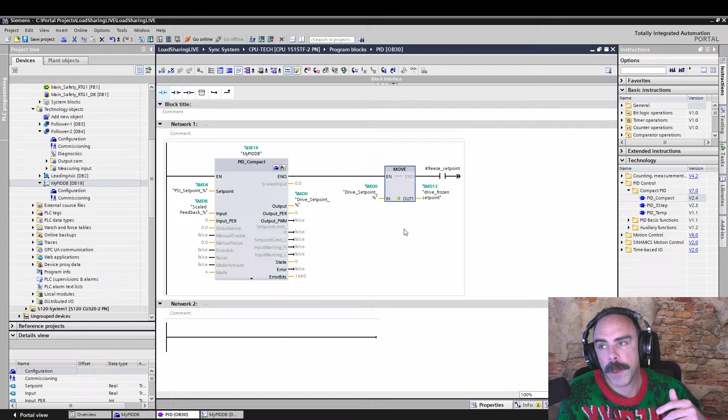I mean, you could throw that drive set point, you could throw the drive set point in as the scaled feedback or as the input, or sorry, as the set point, and then just flip it to manual mode. You could do that sort of shenanigans, because that way you're not going to be spooling up your PID function, and then when you switch it back over, that probably is the best way to do it.

The only problem is you have a disconnect between the drive percent set point, or drive, yeah, so like the drive set point and your actual process value set point. And so, yeah.

Yeah, there's that. So let's talk real quick about this. I'm going through deleting all these in memory afterwards. We shall not have in memory in our program.

If you're new to Siemens programming, don't worry. We're just being gatekeepers. You can use in memory, you'll just be judged. It works, it just makes it really hard to troubleshoot and organize. That's us old people for you.

I will say, the fact that I was just going through and defining tags - if you've only ever used Allen Bradley, that's how we know you're an Allen Bradley programmer. You go in, type define tag, and all of your inputs and all of your programs are in memory. But yeah, we want you to come over. We're not going to make fun of you. We just know, we know.

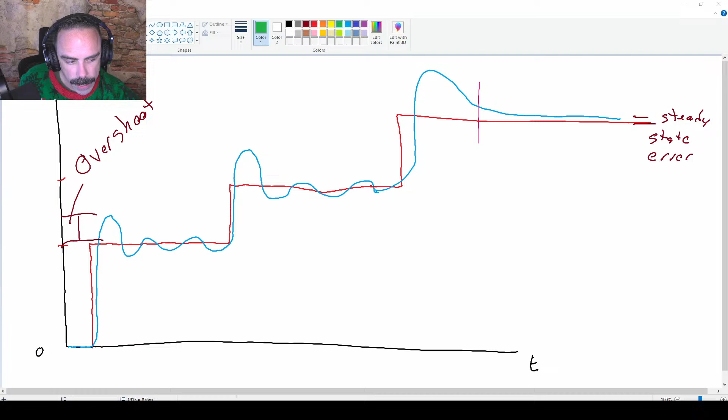If you've done calculus, in this case, like if this is T at 10 seconds and this is 10.5, this would be the integral from 10 to 10.5 of your function. So if this is f of t, your actual response curve, that's what this represents - that's why it's called integral. Get all that off there - calculus is scary. But you don't really need to know that. You just need to know that you're taking a time slice and looking at the error during that time slice.

The way Siemens does its functions, there's two ways to think about this. It's how much error is accumulated in your time - like your integral, your actual ranges - or it's how long of a time are you giving it to correct for the error underneath here. The latter is the way this works.

So the way that you think about the PID functions, since you are in seconds or milliseconds, that's the time frame. You have an integral time. So the value on this actual block for the integral is a time, in seconds, milliseconds, whatever.

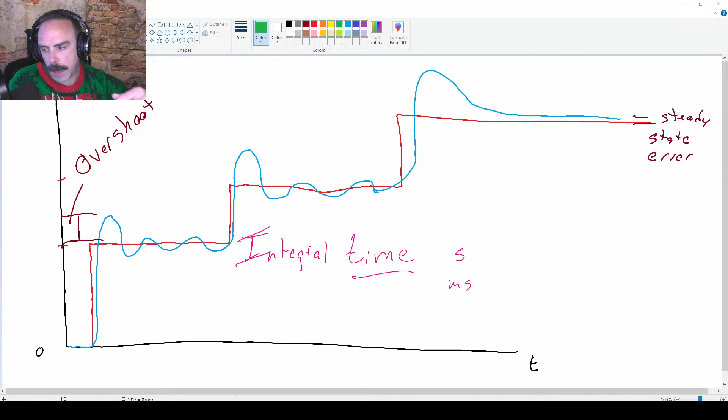So the way that you could think about a Siemens PID for the integral portion is: the higher the time, the less it actually does. The default value is like 20 seconds. So if there is an error, it's going to be taking 20 seconds - how much would it take for 20 seconds to correct for this, if that was a steady state error - it's correcting it over 20 seconds.

That's nothing at all - that's basically no operation. 20 seconds is a very small operation, it takes a really long time to correct for it.

So as you lower this down, say 1 second, that is a medium, reasonable time - it depends on how fast things can react. In a drive system, this is an eternity. You might as well not even have any integral on a drive. You're talking hundreds of milliseconds, or tens of milliseconds, that you're wanting on a drive system.

On a pump system, a second might be a reasonable time. I think I have some pump systems that have like a 1.5 to 2 second integral time on it, because you don't want it trying to come down too fast - because if you have a low P value and your integral is operating more than your proportional, you can run into some problems.

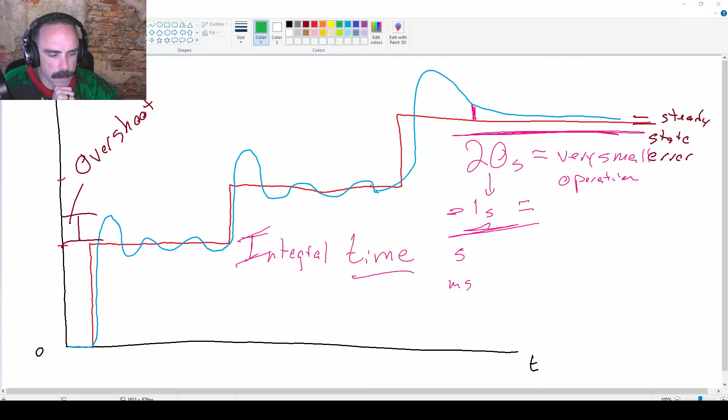So practically, let's look at ways to do this. We're going to clear this, and I'm going to do this - select. Oh, I have to make it a cursor. Select. And then I'm going to select all of this stuff. Select. What you got, Lucid? That's going to delete. Just whatever, do control.

What if I have a process that I just want to correct every couple of minutes? Yeah, it is useful in that case - you would want to turn on and off your PID. Like if you're okay with letting that process value float up to a limit, and then you want to correct it back. You don't want a PID continually doing that, because your integral times are going to be really long, and it'll never be able to actually operate quickly.

Think of it as having your air conditioner running all the time, or it turning on and off at certain set points. That is actually called - there is a specific type of PID controller called a deadband controller. So let's talk about that.

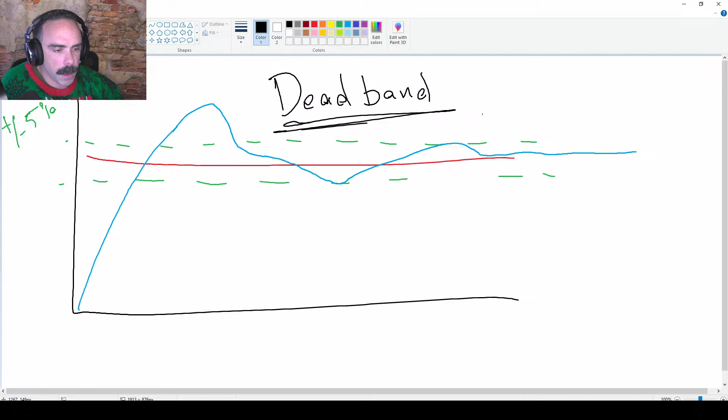And that can simply be taking a PID and then turning it on and off. And so that's probably the best way that you would want to do it.

Or it sounds like you might not even want a deadband - you might just want to run it for like 3 minutes and then have a correction. So you want it to correct up and then just run at that set point, and then after every 5 minutes turn the PID controller on again. That's probably what you're wanting to do. So let's do this. Does that kind of answer your question, Lucid?

Cool, okay. I love how the music got really serious when you're talking about deadband controllers. I really hope y'all can hear the music, because otherwise I just sound crazy talking about the music. I promise you there's music going on.

Awesome, so let's go back to this. So we have a set point, and this is called a step input. We'll talk about the difference between step inputs and ramp inputs, because PID controllers act differently based on them. But what you would want to do is set up to tune a PID.

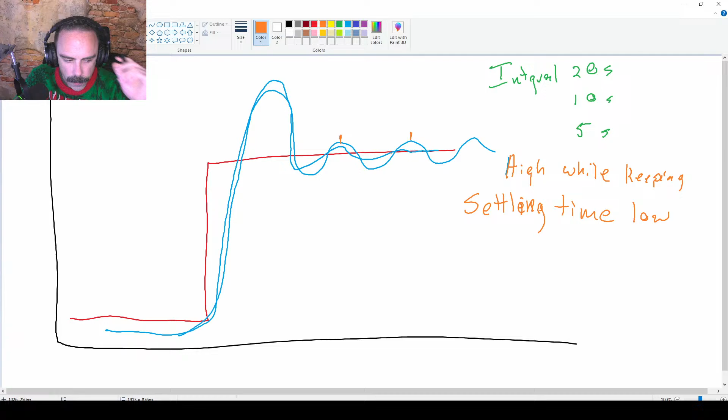Remember, it's going to essentially take these peaks, because this is kind of a product of your P gain, is how fast those peaks happen, and it's going to tighten them up. The way to think about it, I'm going to move them that way. And you think, okay, well, I just want a 0.

No. Well, in a Siemens controller, if you put a 0 in, it disables it, because that would be like an infinite, you would be dividing by 0. So we're not going to do that.

But anyway, so these are kind of the basic principles, and that's kind of the gut feeling approach. There is the science there, and we may talk about that and go through it when we get the books published also. But this is kind of the two points of the PI controller, and you're trying to slowly make changes, slowly move up the performance of everything, and kind of go from there.